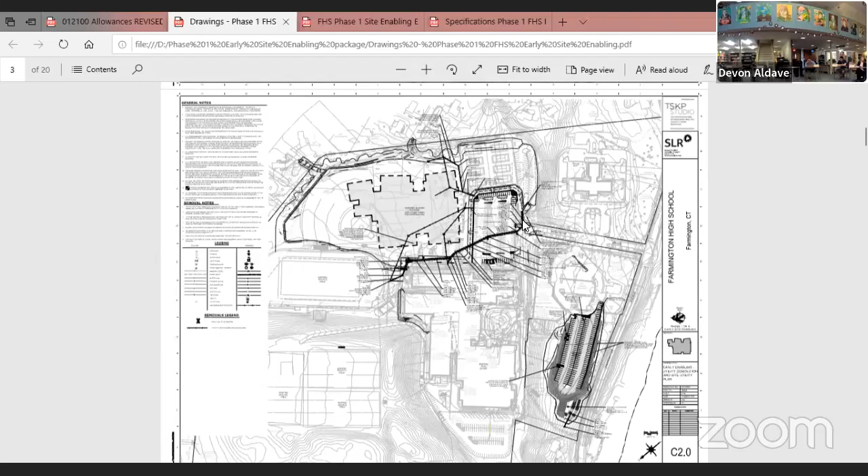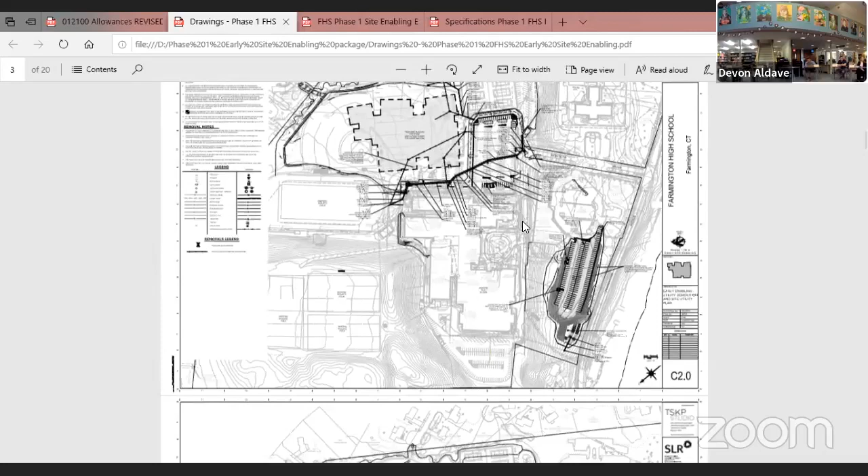So you'll see notes here and hash marks associated with utility removal to make way for the new building site work and building construction - all of the underground power, gas, whatever might service the building. There's even a drawing that shows illustrations of directional signs to direct traffic during the construction period, shown on drawing C3.

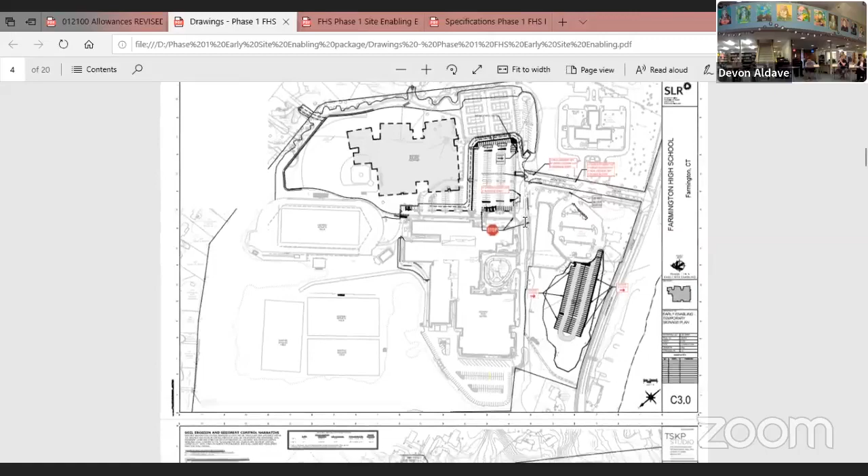Erosion control - we need to make sure site contractors are putting the proper measures in place so there isn't stormwater runoff during the construction duration. This sheet illustrates where those erosion controls occur. There's also a soil stockpile area designated here, which will be staging for soil before actual building construction occurs - they'll scrape off the soil and stockpile it. We had to calculate how big an area that would be and where it would be located for the contractors to know what to do.

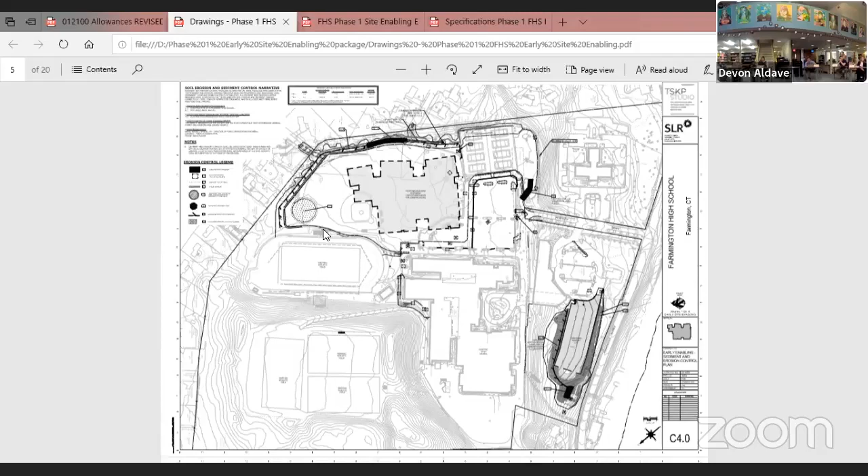Then there are details associated with erosion control - these are pretty typical details. For those of you civil engineers in the audience, these will look pretty familiar.

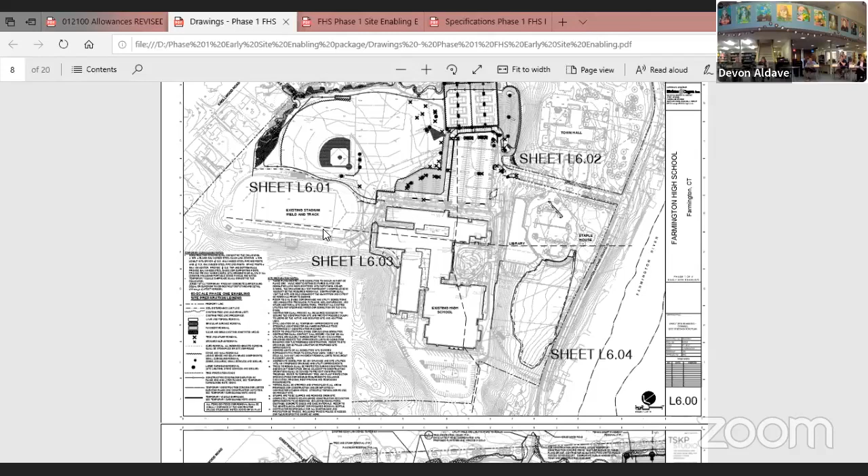All that rustling of paper you're hearing is an actual full-size sheet that I'm going to turn over to Kat and make part of the permanent record. It's a much smaller set than we delivered. No wagon this time. No wagon this time.

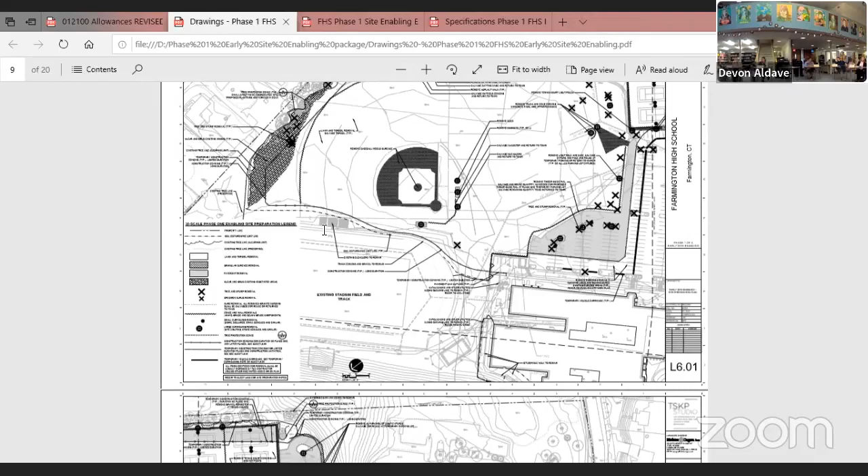So drawing L6 shows site demolition - we're going to be removing the ball field that's out there, removing trees, and taking existing parking lot light poles and moving them to the temporary parking lot. These diagrams illustrate all of that activity. The landscape drawings are enlarged because there's more detail to be shown, so you'll see a larger scale series of drawings.

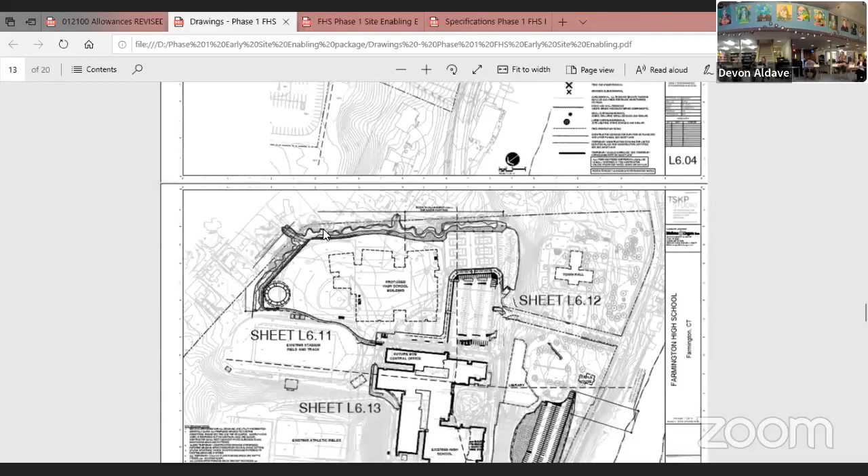Okay, we've spent a fair amount of time discussing with planning and zoning the buffer area along the eastern side of the property, extending out to the northeastern side. We are showing a pedestrian walkway that goes around the construction area. This is a paved walkway so that pedestrians coming from the neighborhood can get around the construction zone safely and enter the school.

We also are going to be doing planting in that buffer area. The actual timing of that planting will depend upon the planting season. It probably won't happen until later in the project. We had some discussions with O&G about that. Nevertheless, it's included in this phase 1 site enabling package.

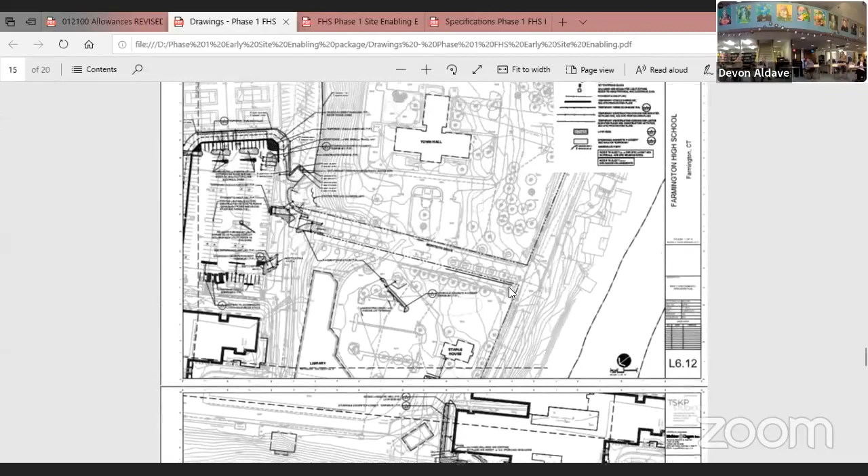Just want to make sure everybody's clear on what they're looking at there and the difference between some of the things we talked about and that additional flexibility. Does everybody understand what Richard's explaining there? It's basically on the back side of the building, going around. Does that make sense to everybody?

Essentially between the building and the concession stand for the sports field, for the athletic fields, that's creating access for queuing. So if the number of cars starts to back up down Monteith on drop off and pick up, there'll be an additional drive lane we can add vehicles to. That's for morning drop off only.

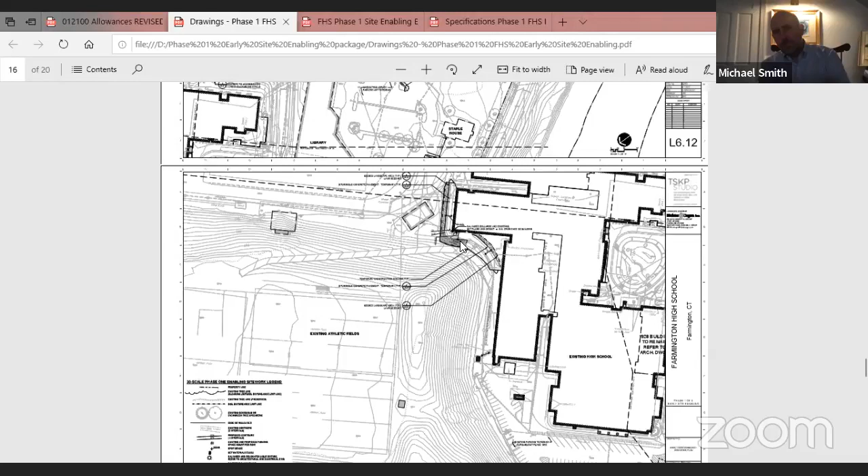And I know there's conversations on this. Obviously you can see where this comes around the building, making sure that makes sense with bus parking and everything else back there. We are putting pavement here right now. It's not all paved, there's a grassy area there, so that will be paved. There's a little bit of regrading work where we approach the slope to create the room necessary to go safely around the building. Is everybody good with that one? That's a little bit different than the things we talked about.

So the plan also shows the parking for the temporary parking here. It shows all of the grading. There are also calculations done for stormwater runoff, and there's a retention area here. But remember, this is just temporary - it will be converted back to a grassy field when the project is done. But for now, this is a paved temporary lot.

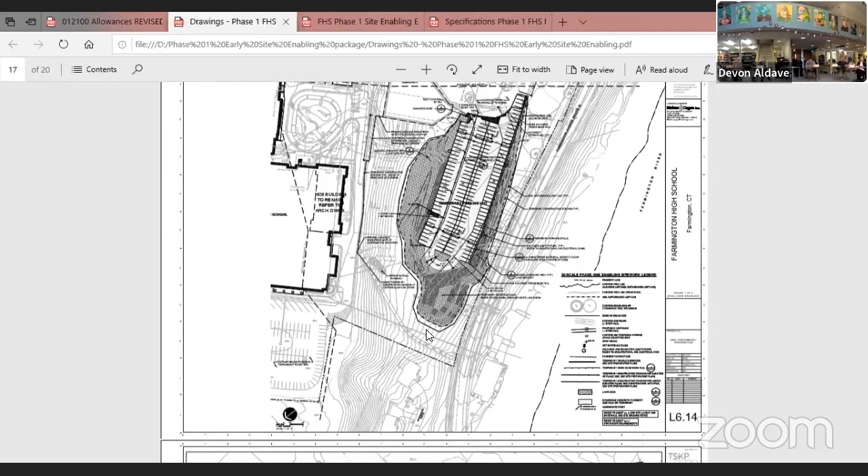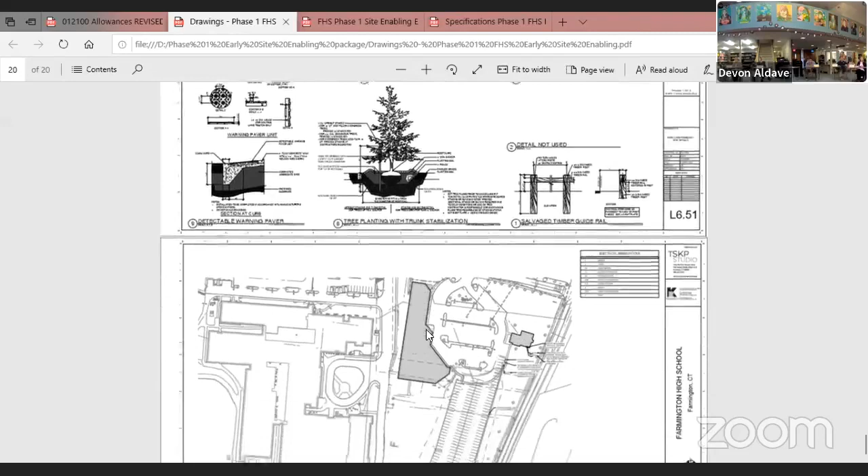And there are locations where - well, I'll show you when I get to the electrical sheet. So this is the planting details, it shows how many plants and the species we're actually planting in the buffer area. And for the landscape architects in the audience, there are also details of planting. And this is the electrical drawing that shows where these poles will be taken from the existing parking lot and planted around the perimeter of this temporary lot. The electrical engineer did go to Staple House to locate an electrical panel that could have a couple of circuits added to it, so that's where the power will come from to power the temporary lot.

So those are the drawings. There's also the specifications, which I'm not going to go through, but if you have any questions - what we're asking this committee to do is authorize and accept the plans and specs as well as a cost estimate that O&G prepared. Both of them need to be approved by this building committee. So I'd be happy to answer any questions.

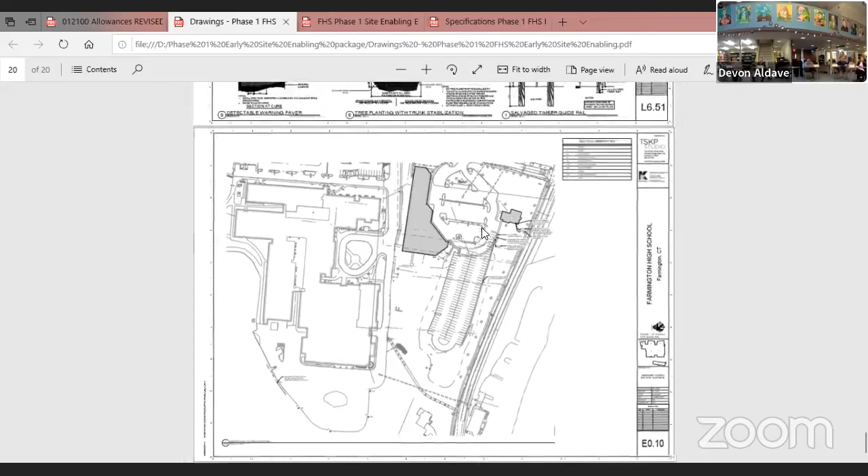Can you just remind - I just got a hand raised, but before we invite you to speak, let me just remind Richard about the path students are taking from the temporary lot. Okay, well, let's see, a little cut off there, but best to do this - let's go to another plan.

So this has a pretty good overall picture. The plan is to put up a fence here at the top of the slope, a gate that leads to that walkway that currently exists, because we don't want people to run up or down the slope. It's a little hazardous, especially in wintertime. So there's going to be a temporary fence installed at the top of the slope. Pedestrians, after they park their car, will walk along the library over to the sidewalk on Monteith, which is illuminated, then up to a crosswalk that leads right to the school. That's the strategy for pedestrian approach from the temporary one.

Richard, question about during this phase one: there isn't any excavation or laying of conduit for any utilities back to the future site. Is that correct? That's correct. So that all happens in the school construction phase.

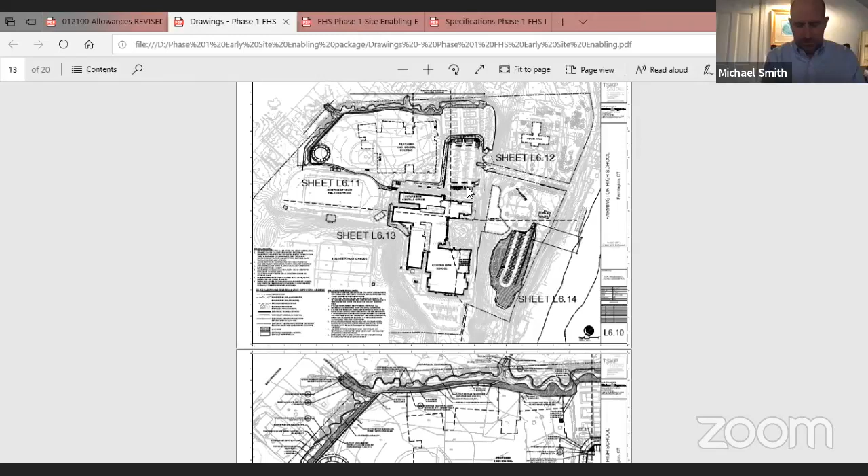And then I have one question, Megan, though it isn't necessarily related to the project team. Given that the school resource officer came up with the idea, I imagine they've thought it through. But I just want to confirm that the school is comfortable creating this access path along the back. I know the reasons why and I support them. Do we feel that creates any safety concerns in terms of accessibility from the back of the building? When we brought forward the plan to build the new high school, we cited security concerns about the number of entrances and exits along that portion of the building. Have we checked in from a straight up security standpoint that, independent of the ease of queuing, this still makes sense, or are there places we need greater security at the back of the building? I'm going to ask principal Scott Hurwitz to answer, since he was part of those conversations.

Scott? Hey Michael, thanks for that question. We worked collaboratively with the Farmington Police Department on this plan, and received their guidance, along with input from the architects and traffic engineers who worked on it. After reviewing it with the police department, the feasibility for us to maintain our best effort to keep Route 4 clear and get as many cars on the property safely and expeditiously every morning was our goal. This allows us to get quite a few more cars, though there won't be any ability to drop off. So cars are going to be waiting no matter what, which they do in the morning right now.

The assessment from the police department, who vetted a couple different options, was this keeps more cars off the roadway and onto our property, with the actual entry point being a secure entrance monitored by security personnel. Otherwise, they're just queuing along the roadway. That roadway will shut off in the morning once the monitor and personnel are in place, and we'll re-gate it. We don't think it's a good use for afternoon pickup, since students will sometimes be exiting to sports or walking home. That's one of the things we discussed when vetting the plan, so we feel good about this as our theory for the best way to get the most cars onto campus and expedite a safe and smooth drop-off experience over the next few years.

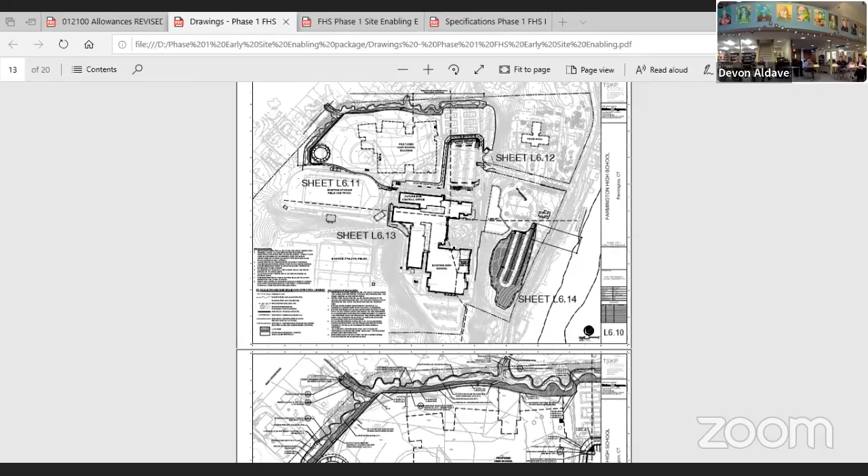Just for the committee's benefit, obviously this is important information for item G4 on our agenda, but we do have another piece to the conversation that's going to come in our next report, and we'll talk through that in preparation for that approval later on in the business section.

I know that's a lot to look at sometimes, but I think when you see them and have somebody walk through, Richard, that's super helpful for all of us. Okay, thank you.

All right, let me go on to construction manager.

As was mentioned, we spent the last month or so working on the cost estimate. We've also prepared the phase 1 construction cost estimate, which you'll be looking at and approving tonight. We've had a team back at the main office - we have an MEP coordinator assigned specifically to your project, and George Gibbons, your future superintendent, has done a review of the community set. So you'll see a list of review comments that we'll be sending over to the architect, which should be by the end of this week.

Obviously we're preparing the phase 1 bid documents. TSKP Studio put together their set, but there's also the whole front end that O&G has prepared, plus managing these state submissions. I want to let you know that by next committee meeting, we should be out to bid. I hope - so the idea is we will go into the state.

Hopefully we get approval within this time frame, and by our next meeting, hopefully we're out to bid. We will be planning and reaching out to schedule an on-site pre-bid meeting with our bidders, maybe before our next meeting as well. So just so you're all aware, we'll be doing an on-site walkthrough, showing bidders the site and answering any questions they have. Hopefully, if everything stays on course, by the time we meet again we'll be out to bid and we've had our pre-bid meeting. So those things should happen in between these next two meetings.